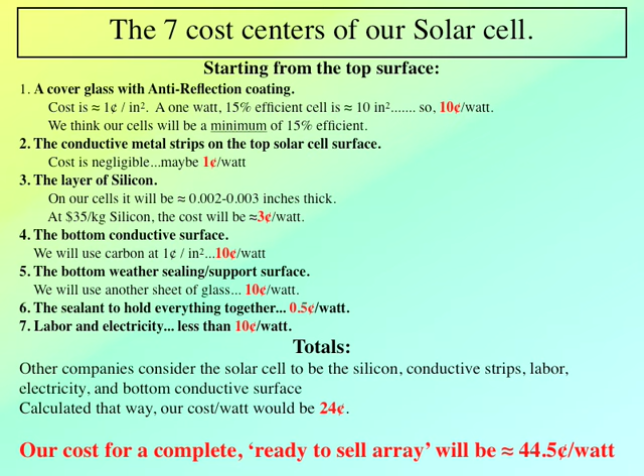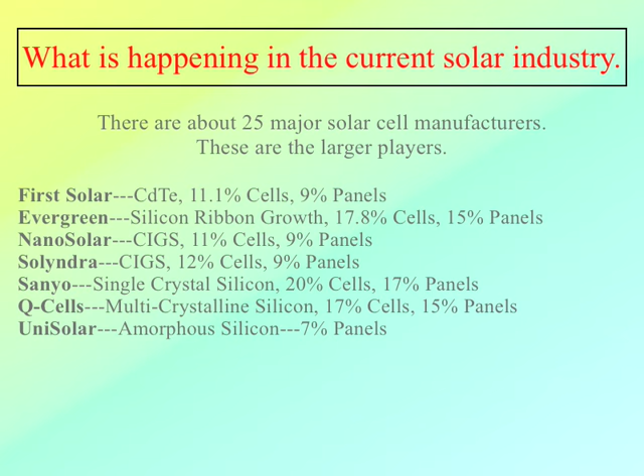The market today is made primarily up of companies that are using some form of silicon, about 86% actually. In the long run, I think about 99% will be using silicon, mainly just because there's a lot of silicon on the planet. There's a lot of sand on the planet. Sand is basically silicon dioxide. If you take away the oxygen, all that remains is silicon. It's abundant, and it's not cancer causing.

The reason I mention that is because that company First Solar that I've been mentioning, they make their cells out of cadmium telluride - that's the CdTe you see here. Now cadmium is a dangerous material. It's regulated. It causes cancer. We don't plan on using any of that.

The worldwide push is to get the cost of arrays down to less than $1 a watt, with low capex. So far, only First Solar has proven able to do that. Now NanoSolar says they can, but they haven't released any figures.

All the other companies are stuck with costs far over $1 and no practical path to lower costs. The thin film processes, cadmium telluride and the CIGS, have two limitations which I think will prove fatal to those companies in the long term. First, their efficiencies are limited to 11 or 12%, and they don't make individual cells. They make whole big arrays or panels at once and have to divide them up. I'll show you later why that's not a good idea.

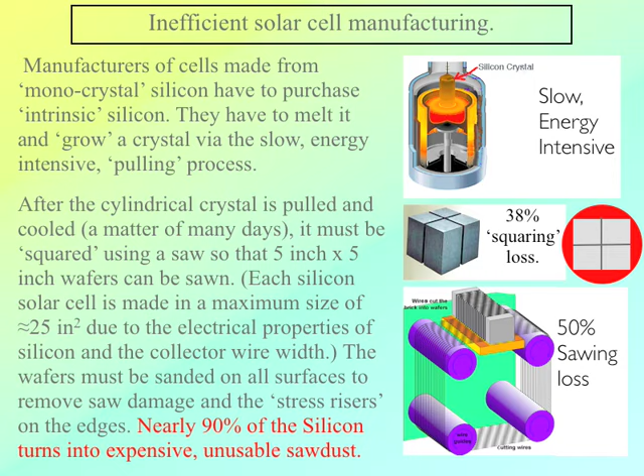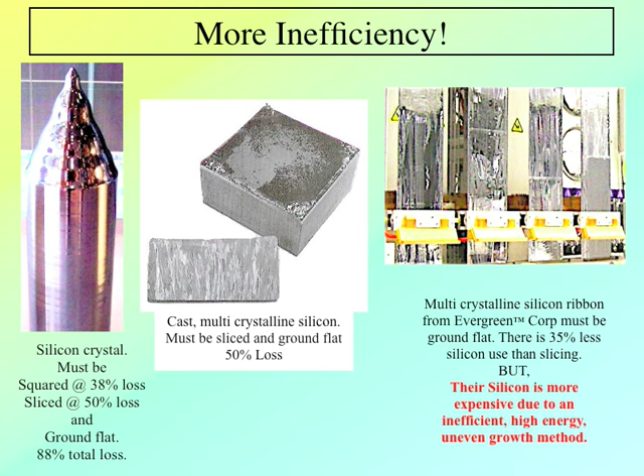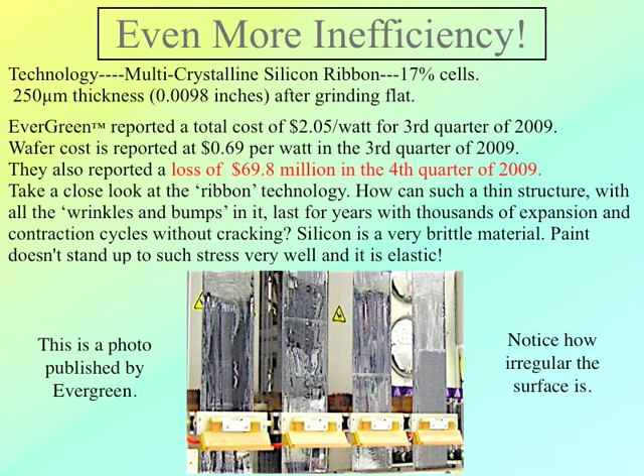Here's a close-up photo released by Evergreen. You can see the crystal ribbon is very bumpy and uneven, and they report some of the highest silicon costs I've ever seen. They're a public company, you can download all their financials. They're losing money, about $69 million just in the last quarter of last year. Honestly, I can't understand why anybody invests money in that company.

Well, what about China? It's always a little bit of a worry, but they're using standard technology and their costs are rising quickly. We used to own and operate two companies in China, so we're really quite familiar with the costs there. The Chinese government says they're going to be raising their minimum pay by 21% in the next couple of months.

So we're really not too worried about the factories there. We've made sure our design for making cells is not labor or capital intensive. We'll have a very strong patent portfolio which will help protect our technology, and we also believe in trade secrets. I'm not really worried about China at all.

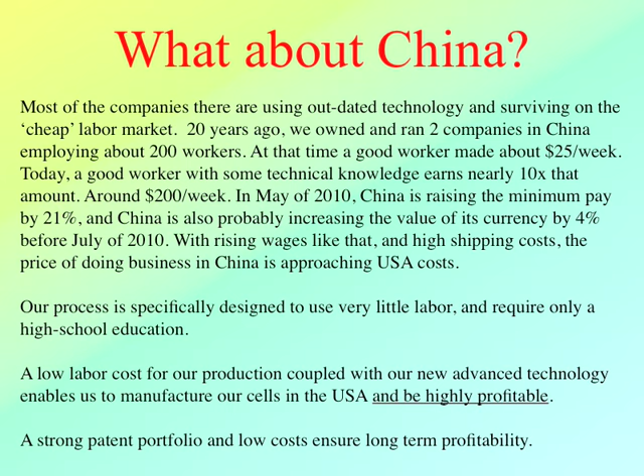We believe the best plan is to develop a disruptive technology, which we have. It's less expensive and simpler than any other. We plan on catching everybody by surprise. We want to operate in stealth mode until we start selling panels. We just plan on keeping it simple.

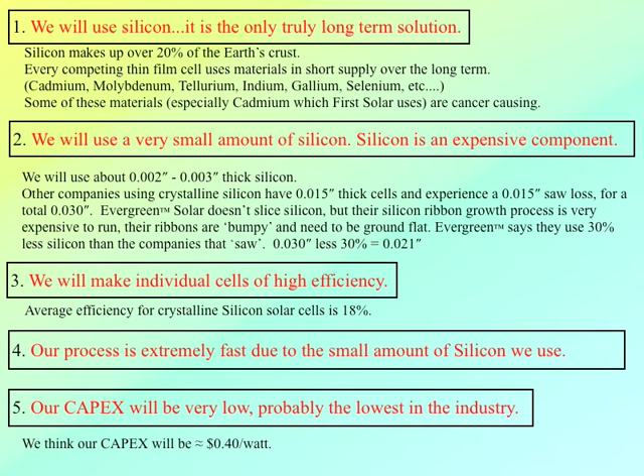Crystallized silicon solar cells are highly efficient, about double the efficiency of the thin film, CIGS, or cadmium telluride cells. By making the whole process simple, we keep our capex very, very low.

This is just to drive home the importance of using very thin silicon. It's all a matter of dollars and cents and common sense: 3 cents worth of silicon in our process versus 36 to 48 cents of silicon per watt in competing processes.

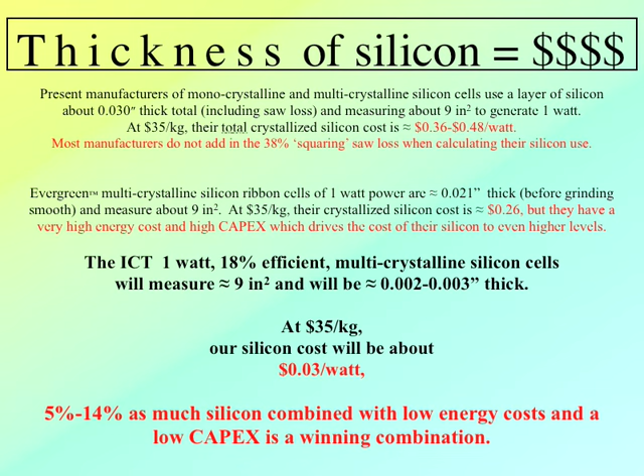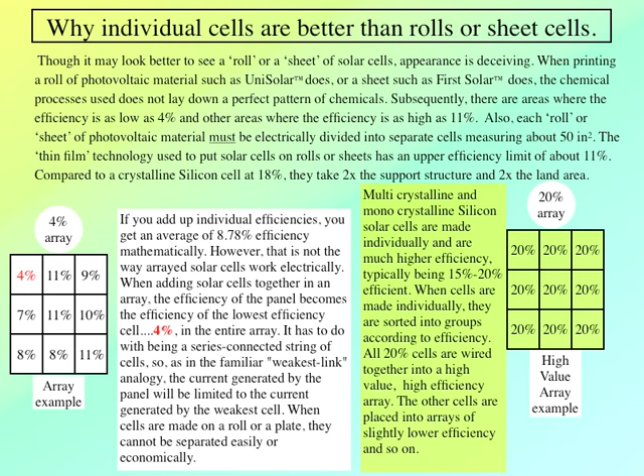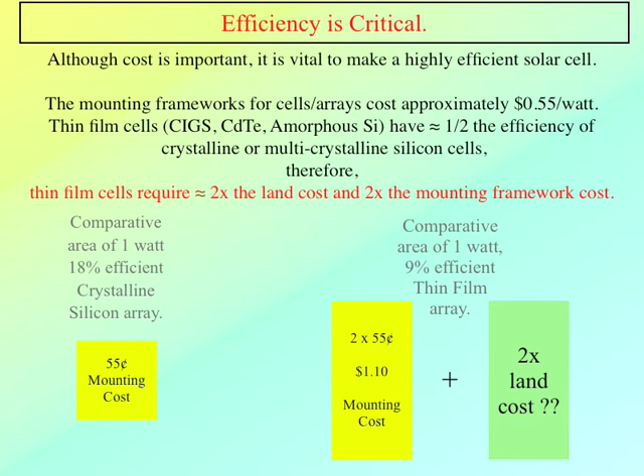Also, efficiency is really, really important. Every thin film cell made has a lower efficiency than any crystalline silicon cell, generally about half the efficiency. That means double the mounting cost, double the land area, double the wiring cost, double the labor. It's very, very important.

This is just an introduction to the next slide, which is actually going to be a movie. What you'll see next is the first released view of our overall process. It uses centrifugal force to spread a thin layer of silicon onto a conductive substrate. No one else in the world does this. It was invented and patented by me, by ICT Corporation.

This centrifuge runs with an interior temperature of about 2600 degrees. It's designed and built in our factory. The cells we make will measure 1 inch by 12 inches, and we'll load over 30 at a time into our centrifuge. We're only going to show one in the movie to illustrate the process, but the output of this small unit will be over 1,000,000 watts each year. Depending on the thickness of silicon we choose, the distinct possibility exists for us to have an output of about 2,000,000 watts from the same unit.

Thinner, less silicon equals faster. We think the centrifuge will cost less than $200,000 once we lock in the design, and our total capex should be less than $400,000. That would be the cost for a complete production line turning out 1 to 2,000,000 watts each year.

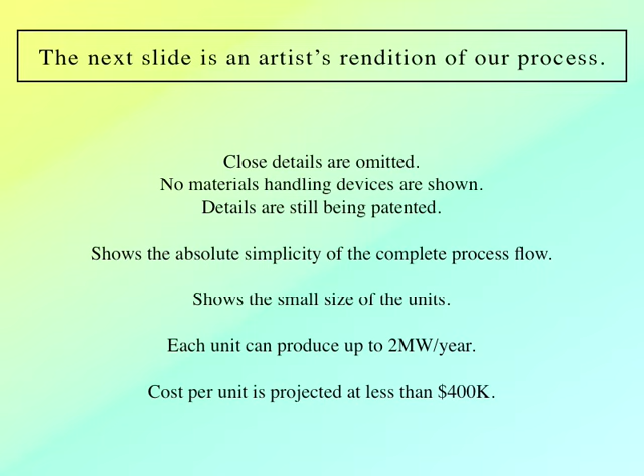Here you can see our entire production scheme. You can see a silicon deposit area, our centrifuge, the phosphorus diffusion chamber, and the silk screen chamber. The phosphorus diffusion chamber really isn't built to scale—it'll be a little bit longer, but we wanted to show it here. The silk screen chamber is also a bit longer, but they're simple chambers. The centrifuge and the silicon depositing area are really to scale, and that's the most important part of our process. We'll get the movie started here.

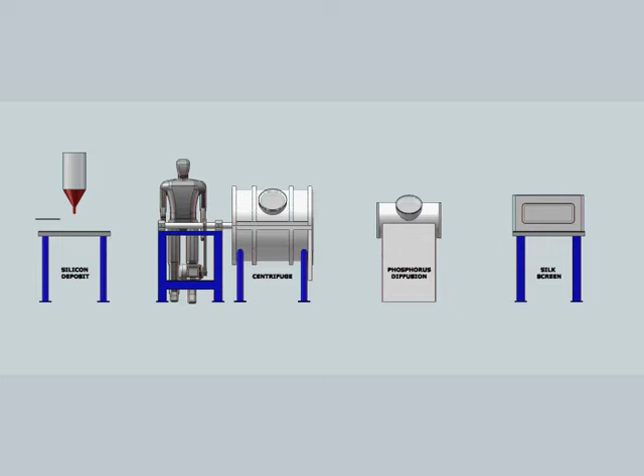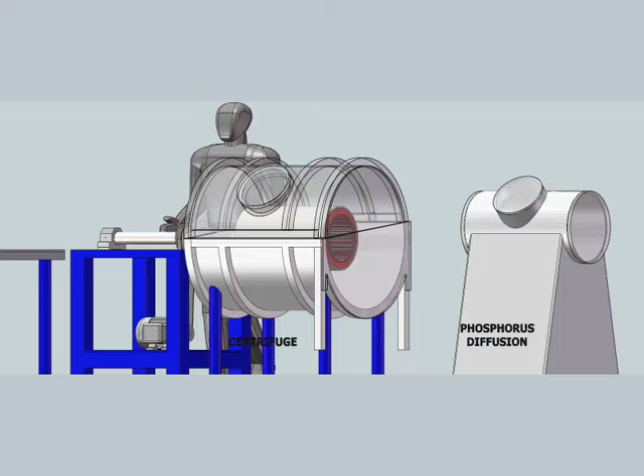First you see the carbon substrate move underneath the silicon deposit spot, where a bead of molten silicon, which hardens immediately, is deposited onto the graphite. Then the graphite with the silicon on it moves into the centrifuge, which starts to spin and then heats up. It melts the silicon and spreads it out into a thin layer onto the carbon substrate. You can see the thin layer of silicon spread evenly here—it's no longer a bead.

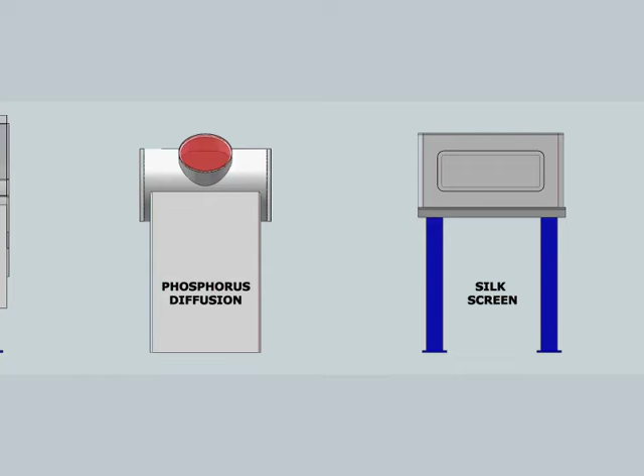After that, it moves into the phosphorus diffusion chamber, where the junction is made, turning it into an actual solar cell. Then it's moved into a silk screen chamber, where the top electrical contacts are silk screened on and baked into it. After this, it moves on into the electrical testing area, where it's sorted and assembled into an array.

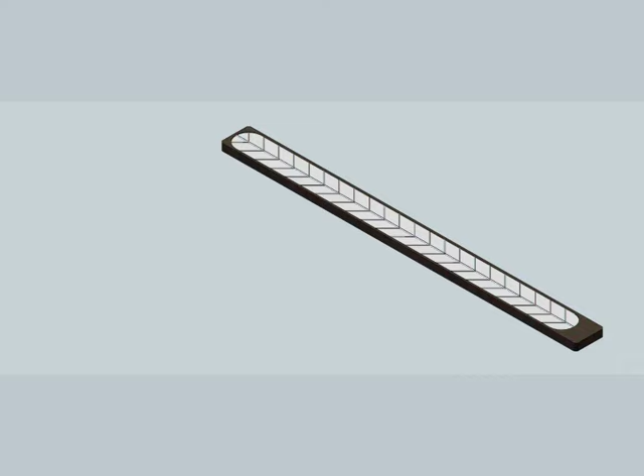This is a very high efficiency, low cost method. It's USA made, and we really think it can be done. Thank you.